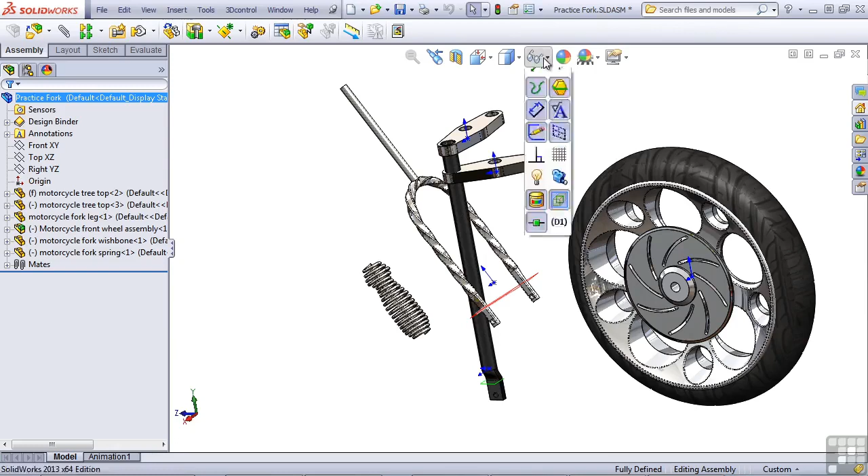Now, there are two ways to deal with these origins. One thing that you can do is you can expand each individual part, click on the origin, and hide it. Or you can go to the Hide Show Items and turn off the display of all of the origins. Unfortunately, when you turn off all of the origins, you're also turning off the main assembly origin, which would be the one origin that would be worth having turned on.

While we're talking about origins, notice that the first part in here is fixed, and we went through this whole fixed float routine earlier. Well, let's float this again. And instead of just arbitrarily fixing it, let's mate it together with the origin. So I'm going to select the part origin and control select the assembly origin, and then pick on the mate tool. And the main option that's available when you mate these together is the align axes.

If you just mate together the origins without align axes, then you've just got a point-to-point coincident relationship, which will allow the part to swivel around as if it were pinned at that point. But the align axes fully defines the part, so everything is locked down. This is, in my estimation, a better way to go than fixed, because it just implies that your design intent is really to have the part lined up with the assembly origin. Leaving the part fixed is easier and faster, and is probably just a question of personal preference.

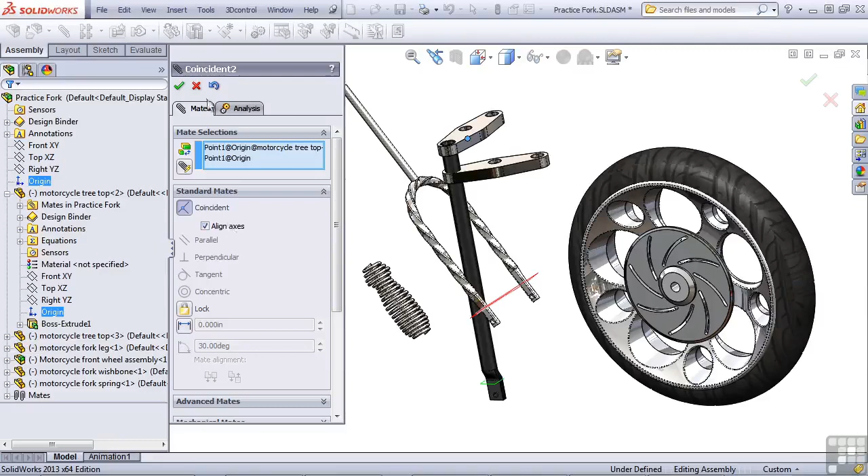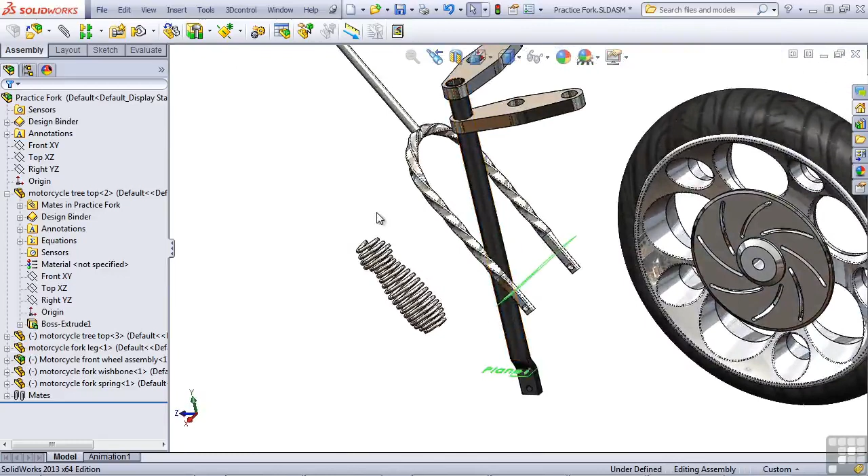Now that we've got the second tree in here partially mated, we need also to put in the second fork leg. And if we look at this fork leg, we can see that it's not symmetric side to side, but it is symmetric front to back. So if I were to mirror this, that would work out. So let's go ahead and do that. Let's use the Insert menu, Mirror Components tool, to accomplish this. On the mirror plane, let's select the right plane, and the components to mirror are just the fork leg. And then we'll hit the green check.

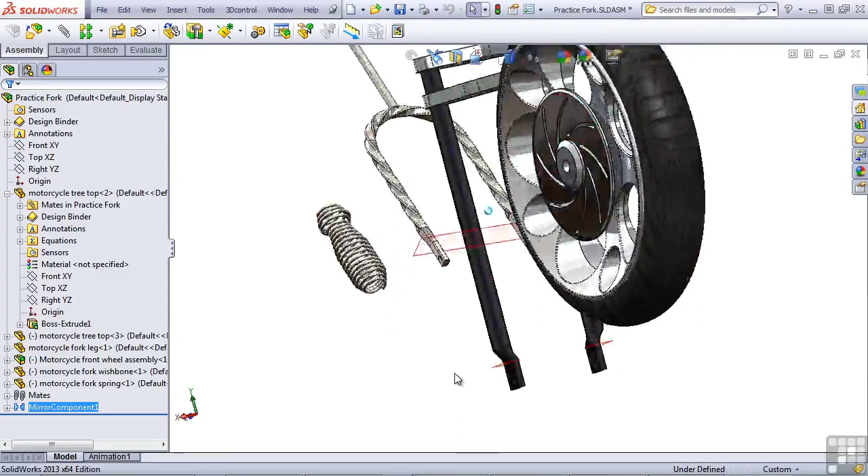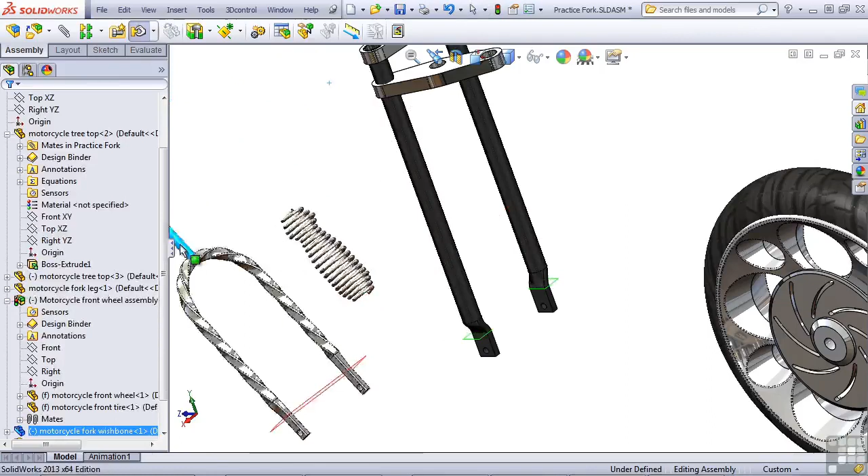Now, the mirror components has some options that we'll make use of later, but for now, all we need is this simple mirror. We could have also copied the part and mated it in place, but using a mirror reduces the need for additional mates. So let's move some parts out of the way here, get that front wheel out of the way, get this wishbone out of the way, and maybe we can hide some planes. So I'll come in here and click on the plane and hide it. That should hide it for both. Notice that these don't move.

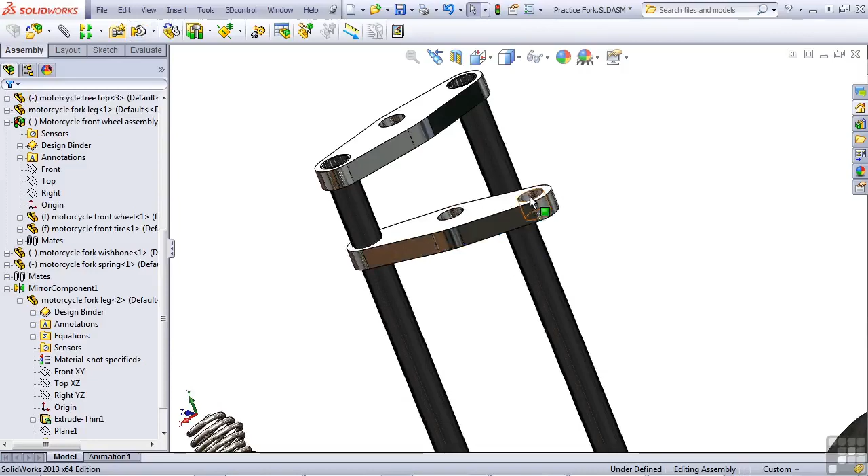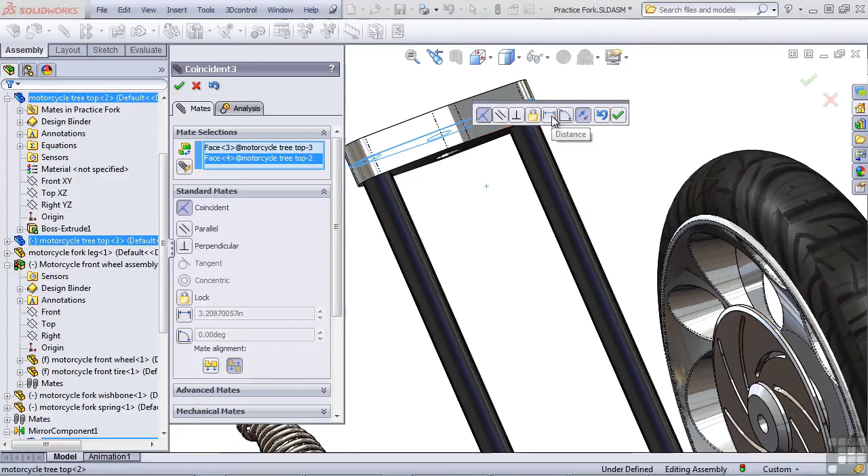That's a good thing. We've got this fork tree we still need to locate, so let's select the cylindrical face and the cylindrical face. Mate these together and hit the right mouse button to accept. Now this moves, so I'm going to assign a distance between these two. When I select them, SOLIDWORKS assumes that I'm going to use a coincident mate, but I don't want a coincident mate, I want a distance mate. And I can assign this to be like 8 inches. You have an option here to flip the dimension so that the 8 inches goes the other way, but that's the way I want it to be. Okay, so let's just accept that.

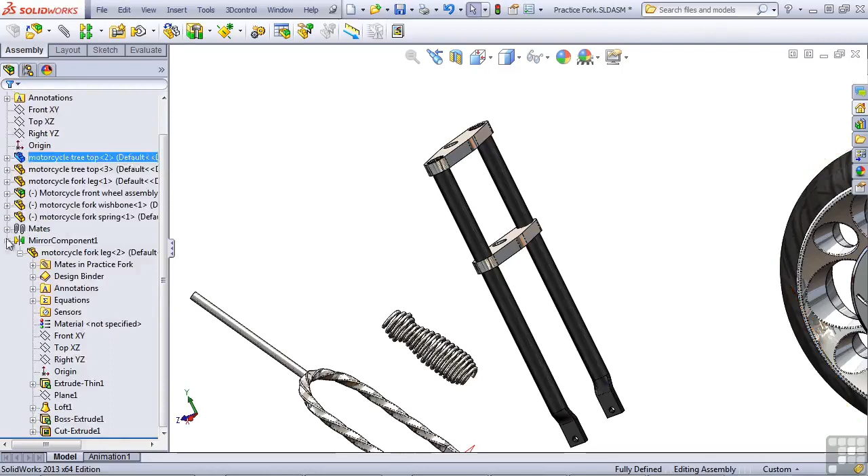Now from here, this part should be fully defined, and we see that the minus is gone from it in the tree. So that's a fully defined part. You can see that the front wheel and the wishbone and the fork are still underdefined.

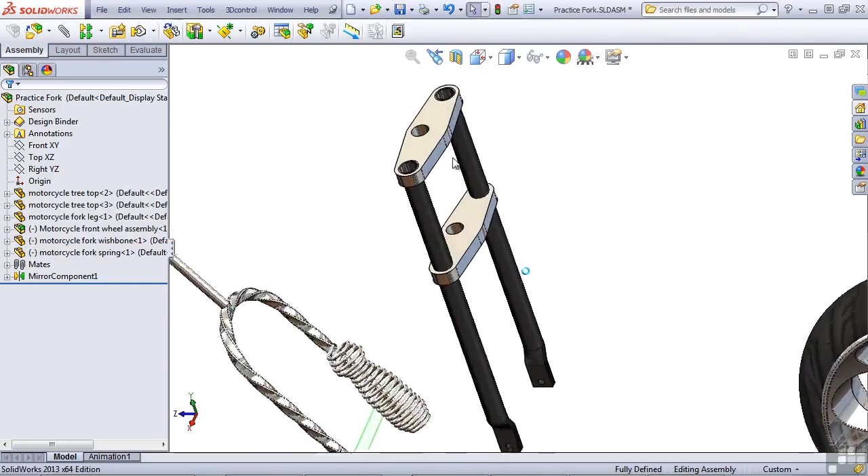The next part that needs to go in is this wishbone. But notice that we don't have a place for it to go. So I'm realizing that I put the wrong part in here. And let's swap out this tree part, since we also have to deal with the issue of the diameter being incorrect. Let's swap out this tree part with another part that already exists.

I'm going to right-click on the part and go to Replace Components in the right mouse button menu. SOLIDWORKS wants us to specify which components are being replaced, and then they want us to say, is it just this particular instance, or all instances. And I want to replace both of the parts. And now I want to select the part to replace it with. So the new part, and we look down through here.

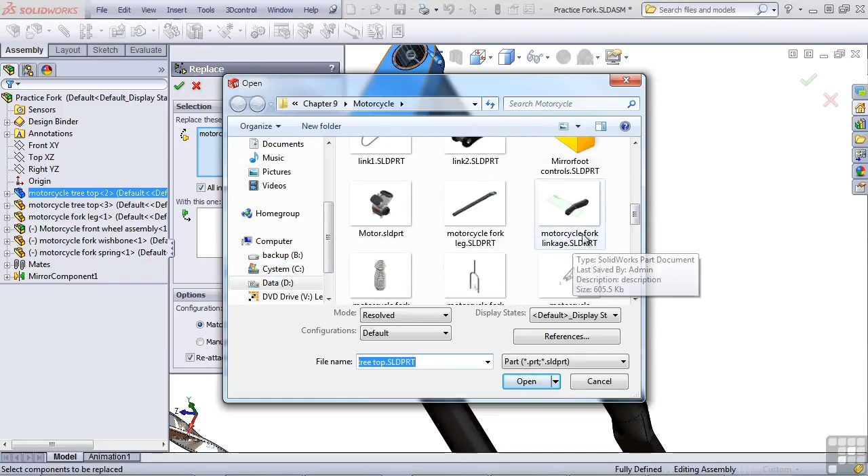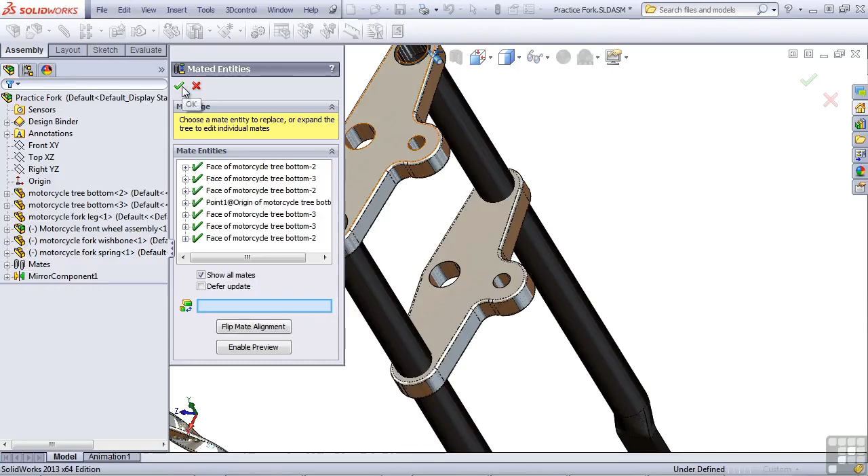We need to put the motorcycle fork linkage in, but not yet for that one. Okay, we need the motorcycle tree bottom. This needs to go on both the top and the bottom. And while this is being replaced, the parts are similar enough that all of the mates wind up working. If the parts were dissimilar in some ways, especially in the mate areas, you would get a red X and you would get the opportunity to repair these mates. So because everything's good, let's just click the green check.

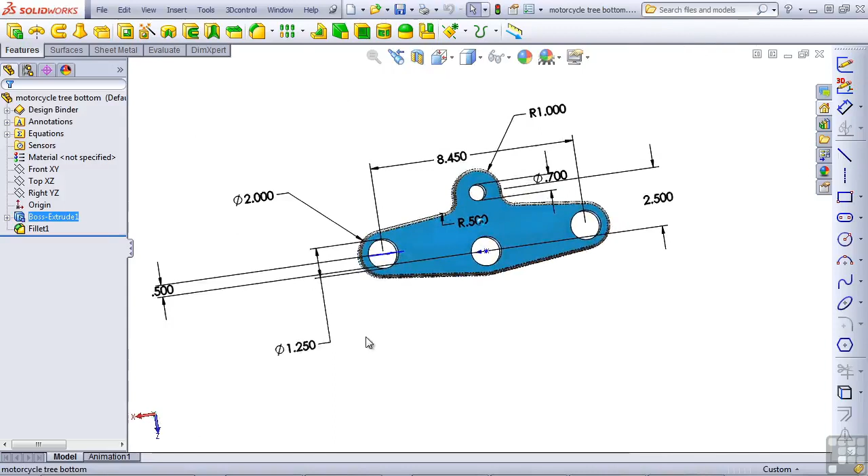Okay, now notice that the hole diameter is still too small. The hole diameter is 1.25 inches and it needs to be 1.45 inches. So let's open up this part and double click on the tree. Got 1.25 inches. Let's increase this to 1.45 inches. And also, since we're here, let's up this value to 2 1/8, just to make sure it's good and strong.

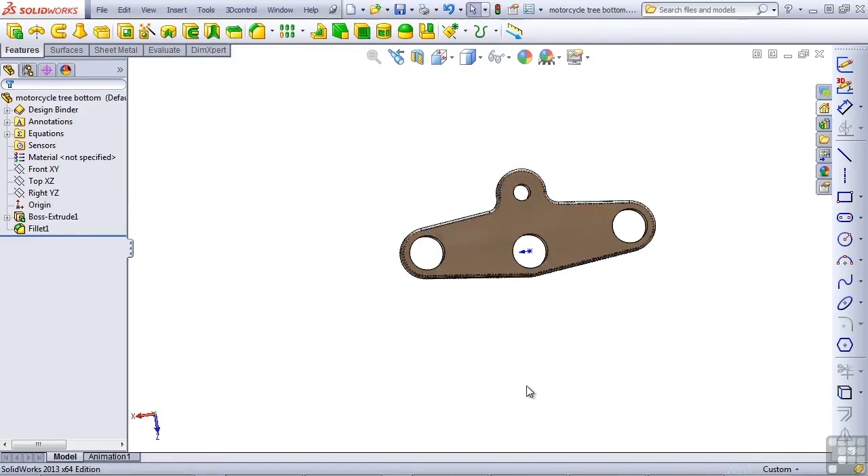And then hit the rebuild symbol. You should notice all of this changes slightly. Flip back to the assembly with Control Tab. SOLIDWORKS is telling us that models in the assembly have changed, asking us if we'd like to rebuild. Okay, so now we've got everything in place. Let's go ahead and put this wishbone in place.

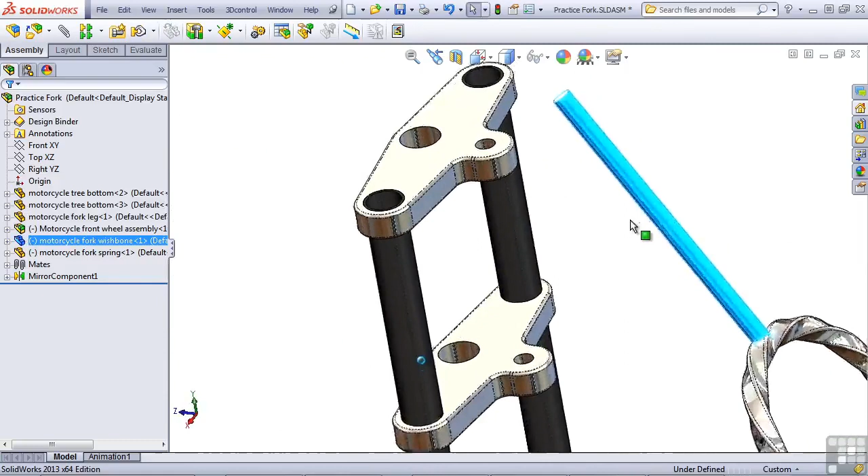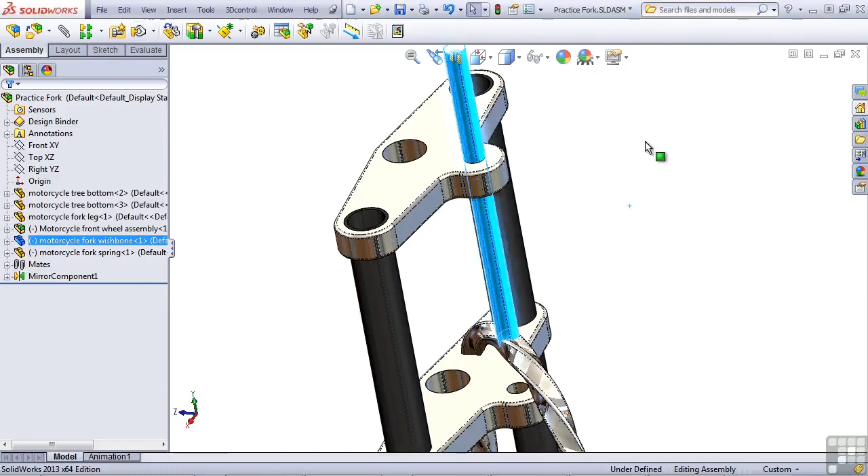There's an easier way to make some of the simpler mates. Mates like concentric and coincident can be made using smart mates. Smart mates can be done by holding down the Alt key, grabbing a cylindrical face, for example, and dragging it onto another cylindrical face, and then dropping the mouse cursor. You get the opportunity to change what that mate is here, but concentric is what I wanted, and I'll just hit OK. So this now allows this wishbone to go up and down. We still have to constrain it to the rest of the assembly.

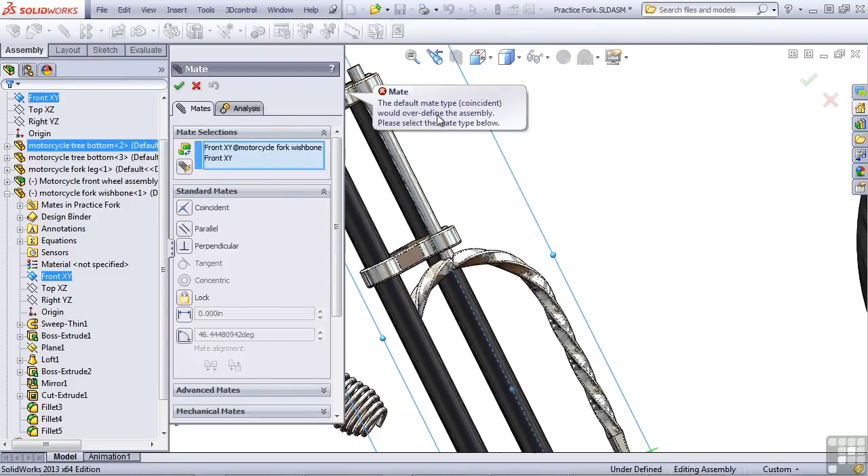So let's take the front of the wishbone, the front of the assembly, and mate these together. Again, SOLIDWORKS is going to try to cause an error right away, but we just want to make sure that's parallel, and parallel will avoid the error. Okay, so now this moves up and down freely. Now we should have put the spring in here. I guess we could lower this and pre-assemble the spring in place.

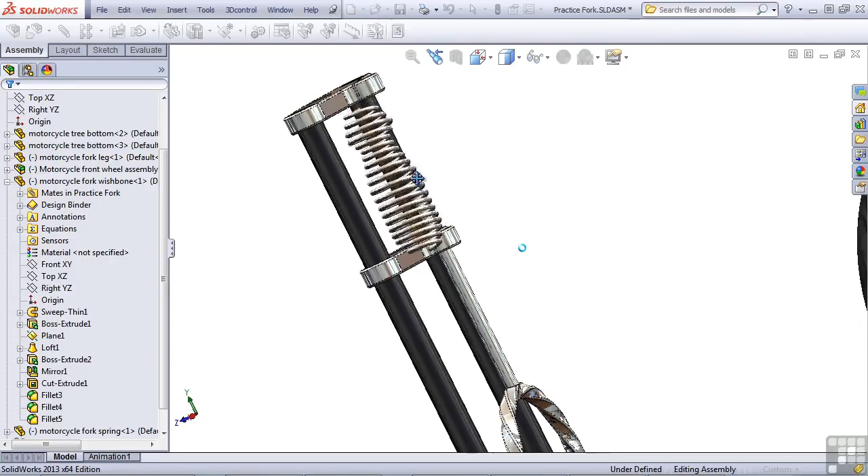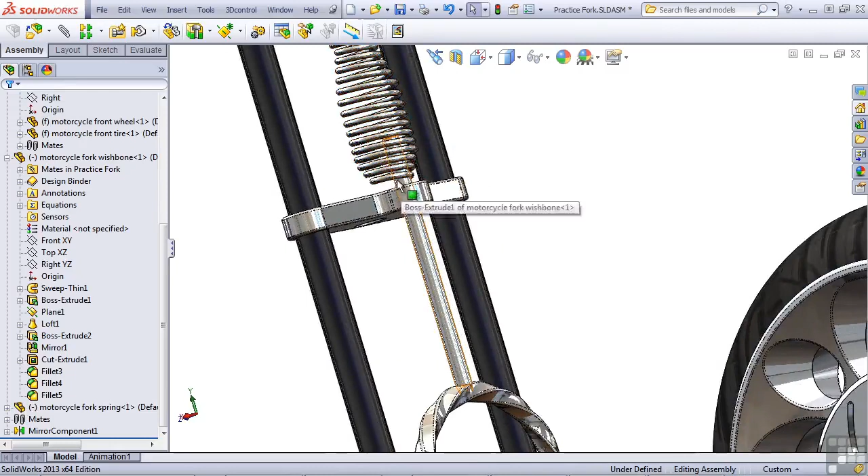This can be difficult to do, to get it right where it needs to be, especially when you're trying to move it in 3D space. Let's hit Shift arrow to spin 90 degrees and move this part kind of into place. Okay. Well, that's as close as we're going to get it by eye. And we need a couple of things just mechanically to make this work. We need some sort of a base on here, like a big washer, to support the bottom of the spring. And we also need some features on the spring in order to mate it into place within the fork assembly. So let's work on this.

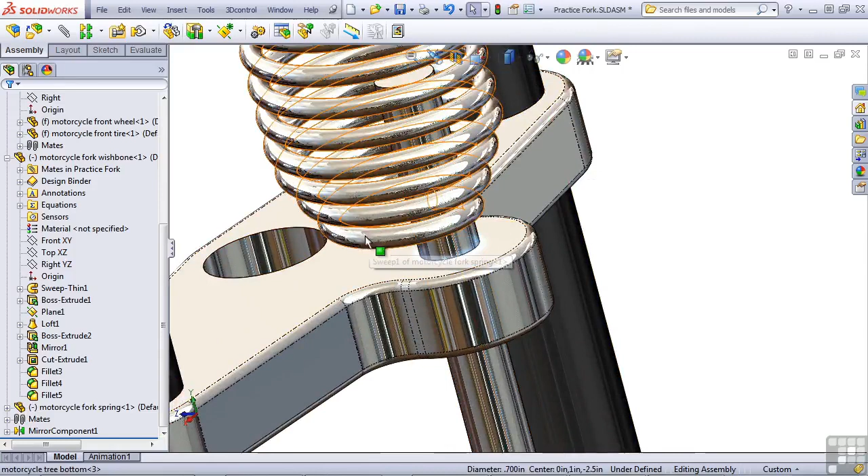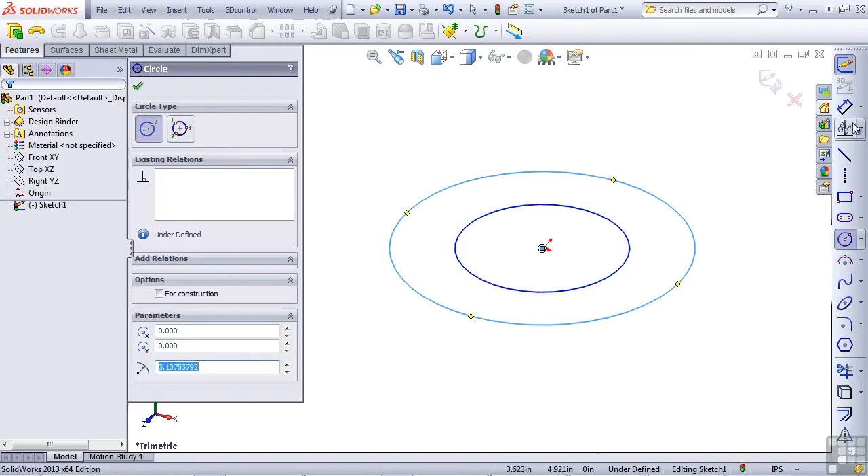The minimum diameter for the washer feature is going to be about 0.7 inches. And the maximum diameter is going to be somewhat larger than that. So we don't need to be exact. Let's create a new part in its own window. And to do this, we'll just select a plane, draw 2 circles. We could draw a single circle with a thin feature, but drawing 2 circles allows us to explicitly call out an inside diameter and an outside diameter.

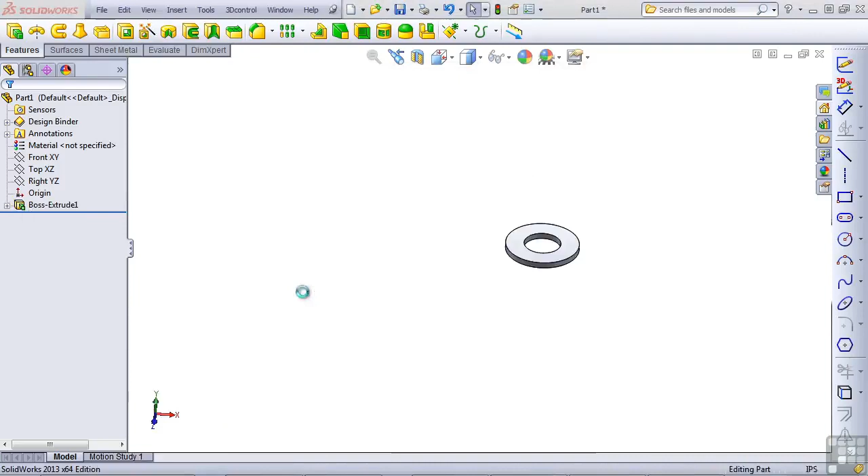Now I'm going to save this file, save as, call this the spring washer. I'm going to hit V on the keyboard for tile vertically, get rid of this window, and just drag this part into the assembly. Smart mate it into place, Alt, drag, drop.

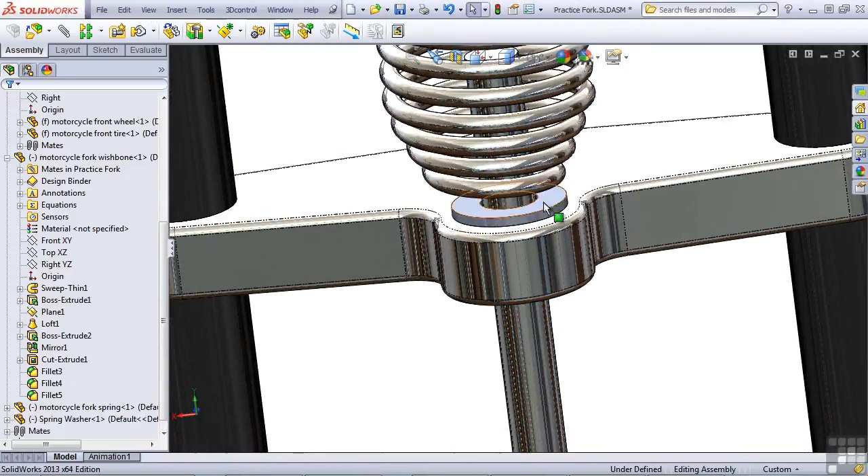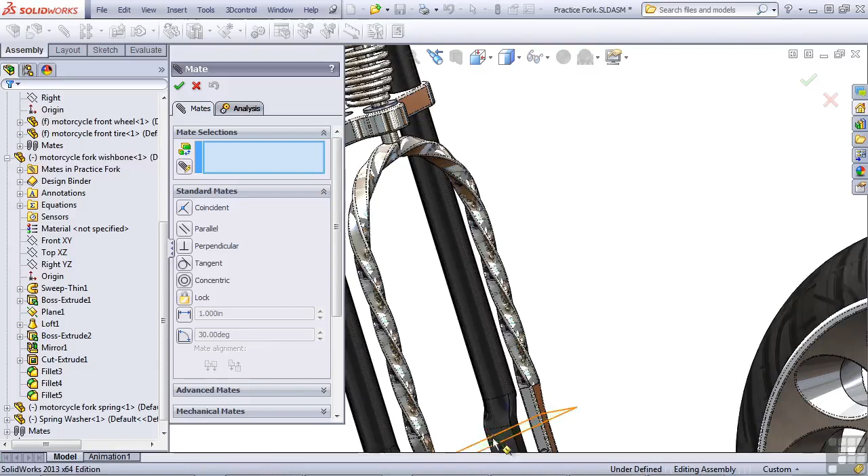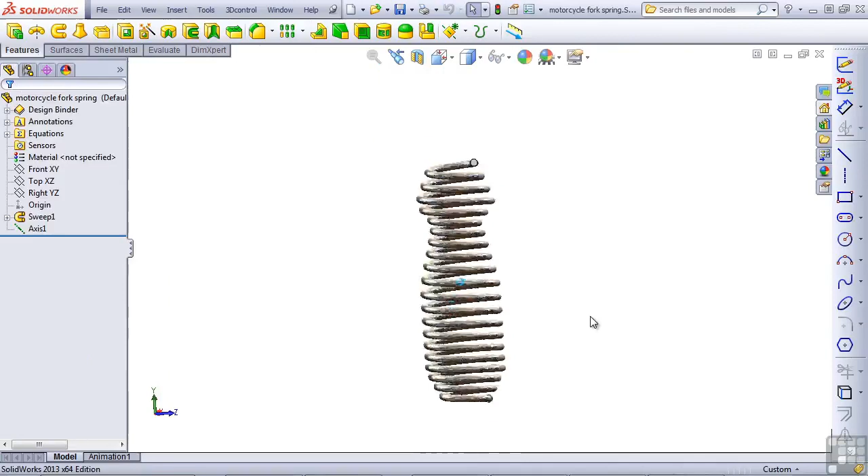And now we need to see how we're going to mate that spring into place. Let's take a look first and see how the spring was made, because this is one of the more interesting parts in the entire assembly. Looks like a rather shapely helix that was created, and it turns out that it is a helix feature, but it's a type of helix with a variable pitch that allows us to define the pitch, the number of revolutions, the height, and the diameter. So this is a very flexible type of helix feature.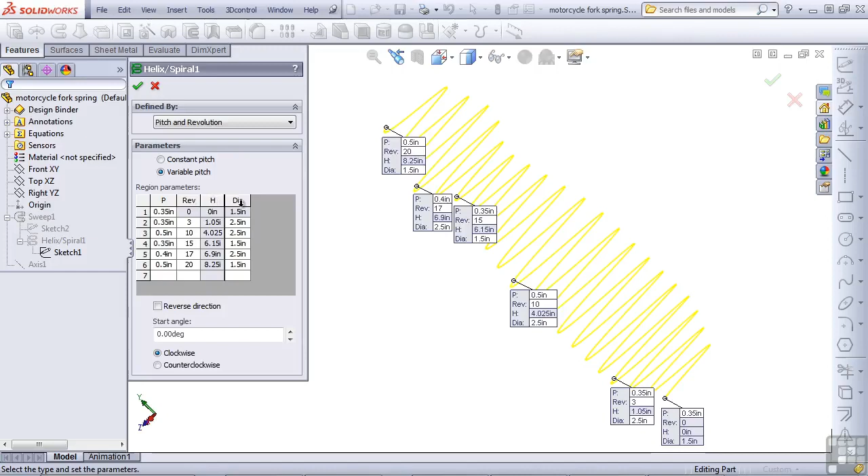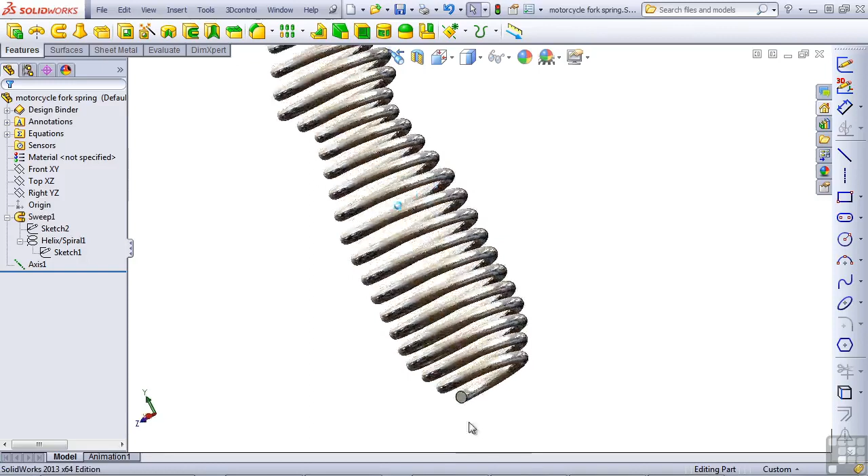So that doesn't leave us really with much to go by in terms of mating this up. We cannot use any of the 3D geometrical features of this part to mate anything to. The beginning and the end faces are planar, but that's about it. The part does have some standard planes and an axis. And so the top plane and the axis are going to be what we base our mating scheme off of for this part. So let's flip back to the assembly. And again, SOLIDWORKS wants to rebuild the model.

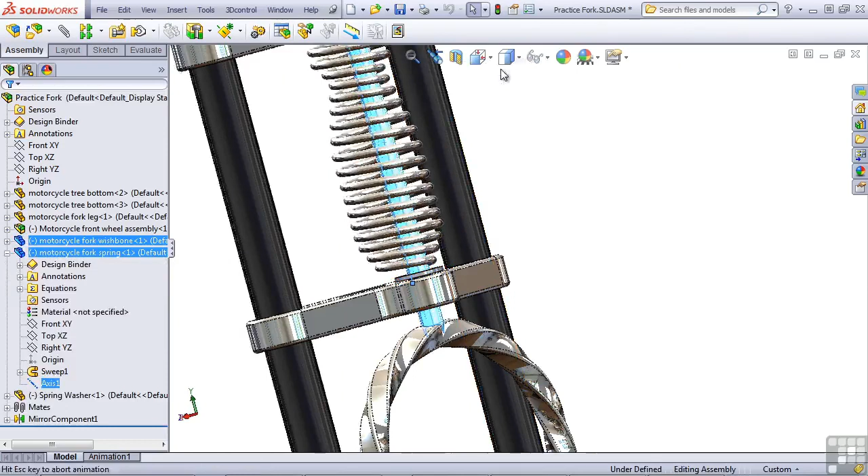Let's just expand the spring, the axis, and the cylindrical face of the wishbone can be mated together. We want these to be concentric, and that's good. Now we want the top plane of the spring and the face of the washer to be mated together, and that's good. This does create an interference between the spring and the washer, but we're going to assume that the end of the spring is ground down and then welded to the washer.

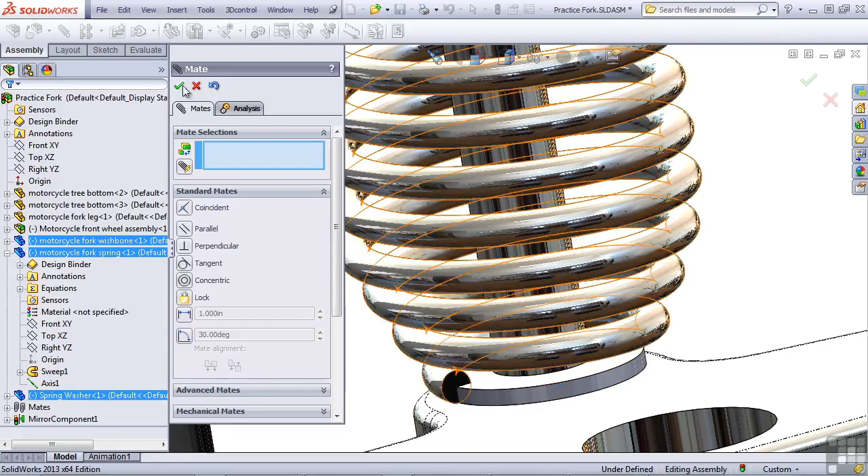So we need to do a couple of things here to update this geometry to make it fit our plan for assembly. The first thing is we need to cut off or grind off the end of the spring. And we could do that using Insert, Cut, with Surface, and then use the top plane to cut the solid part. SOLIDWORKS is going to consider a plane as a surface for this operation. Notice that this arrow in the middle of the part is pointing down, and that's talking about which side of the plane is going to be cut off.

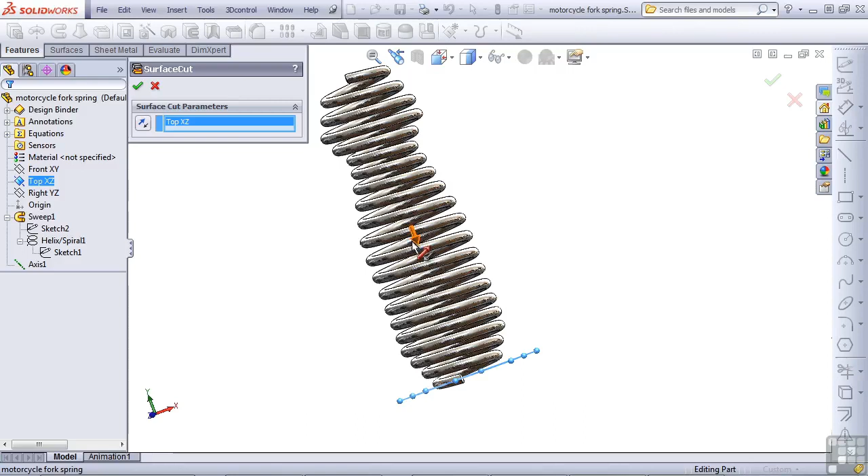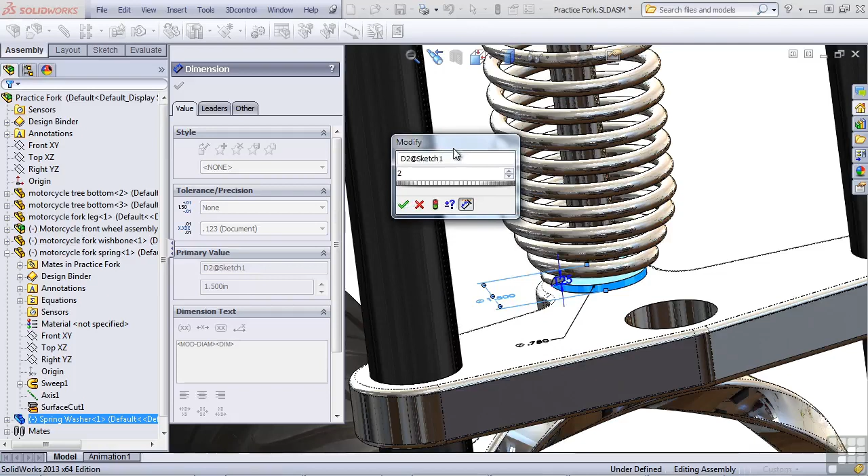So that does create a flat now on the bottom of the spring, so there should be no more interference with the washer. Now we can double click on the washer and change this value to something that will fully support the spring, and give us a little space in here to get maybe a weld in between the washer and the spring.

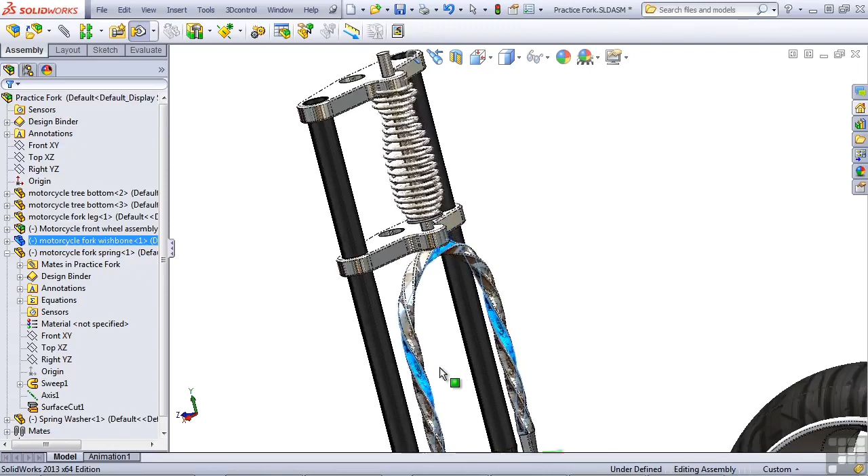Now let's check the movement to see if the movement works. Just grab the wishbone and push it up and down. And it does work. Now SOLIDWORKS is not going to allow us for this type of motion to create a flexible spring that compresses as we move the wishbone up and down. That type of motion is typically more costly than what we've done here. We need to insert a couple more parts and do a little more mating, and we'll get right back to that in the next lesson.